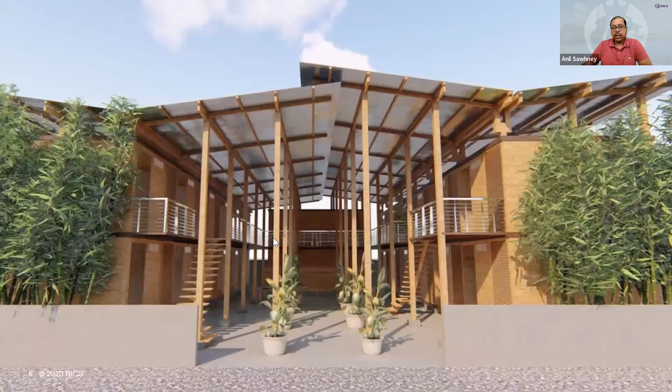We help develop professional skills and knowledge and expand opportunities for our members to apply those professional skills. Everything we do is designed to effect positive change in the built and natural environments. So that's our vision and mission statement as RICS. As I said, we are a global body. We have about 134,000 individual qualified and trainee professional members.

Our membership is what's called a chartered membership. So it's not a simple step of paying your annual membership dues and becoming a member of RICS. Members have to go through a charter process in which there is an assessment, there's an interview, and you have to share your project experiences before you get the MRICS chartered professional status. I am a fellow of the RICS. We have members spread all over the globe, as you can see. I work out of our New York office, but I'm based outside of the Washington, DC area.

And similarly, many of my colleagues are spread all over the globe, with a large number of us in the UK, in London and Birmingham offices. So we operate, as I said previously, in built and natural environments. We operate in the main areas of land, property, and construction. So we're really a broad church.

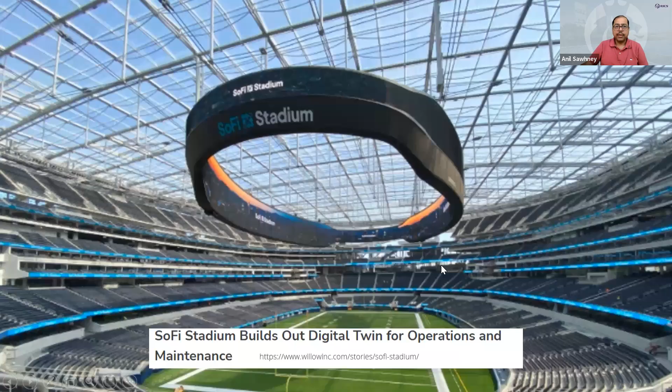So let me just tell you that digital twins is something that's already happening. It's happening now. I'm sure many of you will recognize this, the SoFi Stadium, which is now an operational stadium with a digital twin. This is a pretty large development, by some estimates about $5 billion worth of real estate, lots of ancillary buildings and assets surrounding the main stadium.

So as the construction of this asset was progressing, the owner, the project sponsor, decided to take all the information, the documentation, all construction product methods, materials, information, and put that into a framework which we call digital twin, and hand it over for operations and maintenance. So many of the things that you would expect somebody running this asset to be able to do can now be done using that digital twin. So that's a very clear example of how digital twins are impacting our work and our participation in this emerging area.

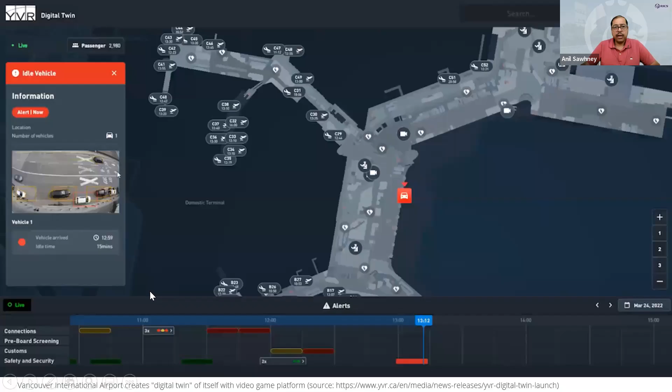Another example recently released, the Vancouver airport has a digital twin where, again, during design and construction phases and for existing assets, all laser scans and all that material was brought together into a twin. And this twin can be used for many things. It can be used on the air side as well as on the passenger side for getting latest and real-time information. Here you see a screenshot and an example of how it's being used by the airport authorities to run the air side of the airport.

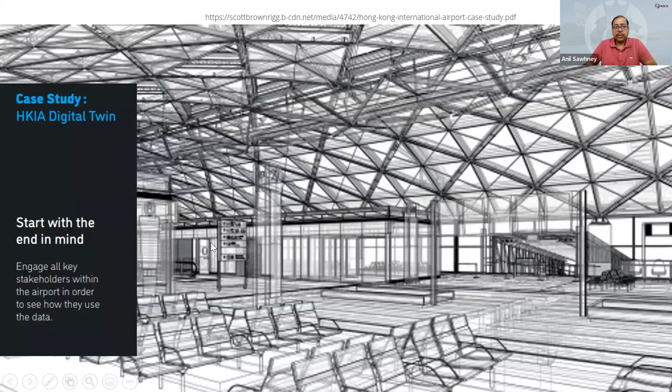Similarly, the Hong Kong International Airport has a digital twin, and it's being used by various stakeholders to run the airport with the help of data that is available through various mechanisms during design, construction, and operation.

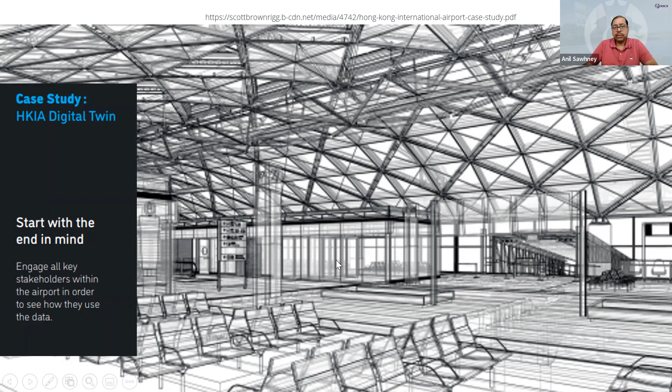Many of you may already have a digital twin of your home. So in my house, I have various gadgets as I'm a construction tech enthusiast. We keep putting in various things. You can have cameras, lock sets that can be operated remotely, garage door openers, various appliances. So these are basically Internet of Things devices that can go into your house during construction or post-construction. Then you could take Matterport, which is commonplace in real estate transactions these days, and create a model of your house. All of that can then be brought together in an interface, called a digital twin, that connects to the physical asset, and you can operate and maintain your house using that digital twin.

I have a little interface, which is a link on the top. I don't think I'm going to go there. With live demos, sometimes things can crash, but you get the point. Earlier on, each one of those devices had its own app. So on my iPhone, I could open the lock. If I forgot to close the garage door and I was in my office, I could actually use an app to close the garage door. But now it's integrated into one dashboard, one interface. And that's where digital twins come into play.

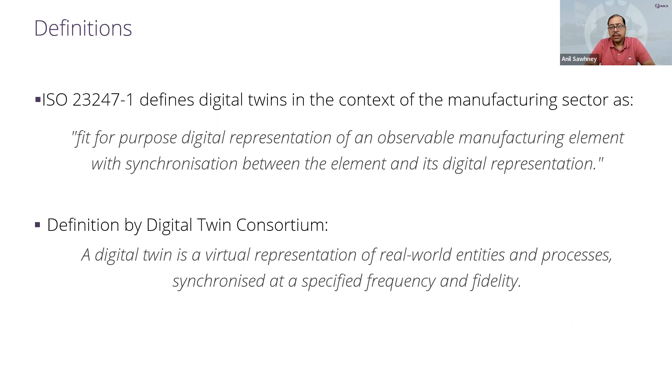What we follow, what RICS follows and our member firms follow, is a definition by the Digital Twin Consortium. DTC is a US-based not-for-profit entity that has been brought together by the likes of Microsoft, Autodesk, and other major industry players. It's sector agnostic, so it applies to the energy sector, perhaps pharma and others, but it also has an AECO working group, and I'm a co-chair of that working group, where a digital twin is defined as a virtual representation of real-world entities and processes synchronized at a specified frequency and fidelity. So that's sort of the technical definition.

There are other definitions. We work closely with the Centre for Digital Built Britain at the University of Cambridge, and they define digital twin as a realistic representation of physical assets. For example, a digital representation of an airplane that can be used to monitor, predict performance, feeding out insights and interventions.

So what you would have noticed by the examples and by the definitions is that right now, the industry, the construction sector, or broadly the built environment sector uses digital twins mostly during the use phase of an asset. So most examples are, can I turn on and off a switch in a conference room when it's not occupied? Can I measure the temperature, humidity, and other factors in a space? Can I figure out maintenance and operation decisions on assets?

So very quickly, you will notice that most of the literature available right now focuses on the operation, maintenance, and end-of-life aspects of a digital twin. But what we have done at RICS is that we try to now connect it back to the design and construction phase, because we believe that digital twins should be used as early in the life cycle as possible. So we took all those definitions of a digital twin and brought them into the context of design and construction.

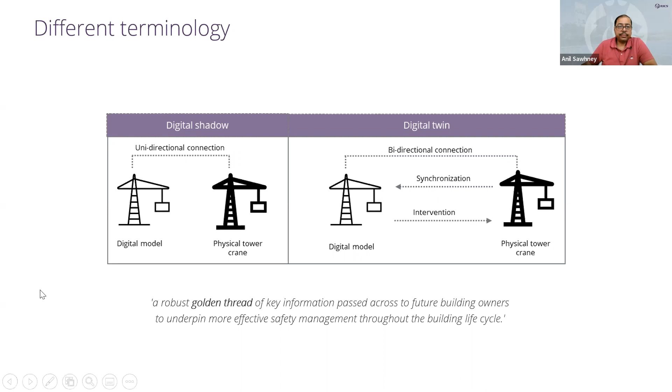But more importantly now, folks are talking about what's called a digital thread. A digital thread can be viewed as containing all the information necessary to generate and provide updates to a digital twin. What is a digital thread? A digital thread is essentially a digital representation of information which connects all the life cycle steps. Because if you generate some information at the concept or design stage, do lots of synthesis and analysis on that data, make decisions, but if you don't connect all this information and carry it forward into the construction, manufacturing, operation, post-life phases, then the idea of digital twin doesn't really work.

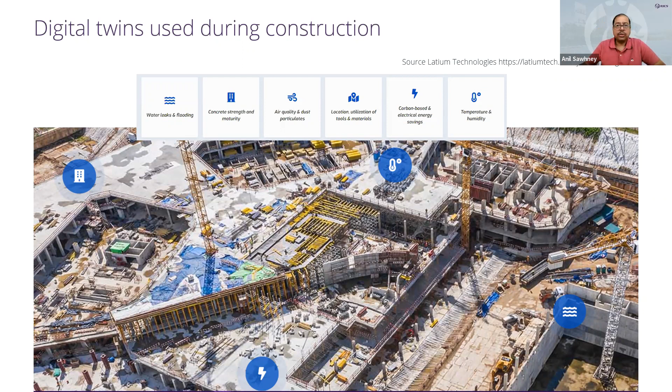So therefore, design and construction is crucial and plays an important role. And we tried to bring all of this together in a book that I wrote with a couple of my colleagues, Javier Irizarry from Georgia Tech and Mike Riley from Liverpool John Moores University in 2020, where we basically are saying that there's a lot of progress being made today in the construction sector, but sometimes it's not unified and glued up together.

You have on the physical layer, on the construction side, folks have worker sensors now or wearable devices where you can see what's happening with your workers. You have robotics automation, you have IoT, 3D printing, lots of other prefab and other physical technologies helping with the production process. You have a digital layer where you have maybe a cloud-based common data environment or a repository for all your information.

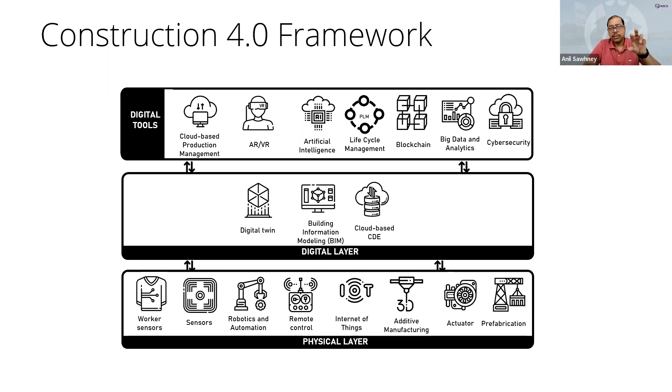You're doing BIM, but you're not gluing all this together if you don't think in terms of a digital twin. Once you start thinking in terms of a digital twin, you can then deploy several digital tools or dashboards that can then help drive construction forward. And this is what the Construction 4.0 framework, the topic of our book, is, and the connectivity of digital twins to that Construction 4.0 framework.

So at the end of the day, the vision is that we will BIM it, we'll twin it, we'll build it, and we'll operate it. So you have projects that turn into assets. We will start BIMing, twinning during design and construction and carry it through into our assets where we operate, maintain, renew, and even do end of life, recycling, and other stuff, repurposing using digital twins.

Now, that then will help our sector address very important outcomes that society is expecting from us today. Environmental outcomes: everywhere today you will see we talk about decarbonization of the construction sector. In fact, I moderated a webinar yesterday for RICS where we talked with experts from Skanska, CBRE, and Gleeds, discussing how decarbonization is important. We'll also talk about social outcomes from our projects and assets now, and obviously we've always talked about economic outcomes. So with the help of this vision of BIMing, twinning, building, operating, we should be able to get that vision accomplished.

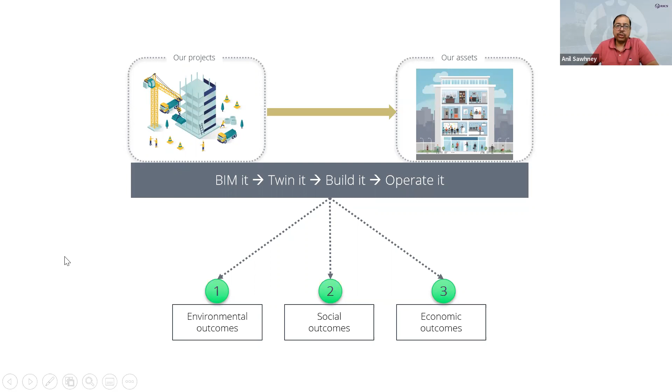But what's crucial is data sharing and collaboration. So as an industry expert, to accomplish those outcomes or broader impacts, we use all the tools, technologies, paradigms available to us. But at the end of the day, if we don't share data and collaborate, none of this is possible. So that's sort of how we can bring it into the construction sector.

I'm going to quickly share with you a global survey that we ran to understand the current state of digital twins. So when we did a survey late last year, this is what we got back, and it's not surprising: very few of those surveyed are actually using some shape or form of digital twins. About 21% are currently using digital twins.

About 18% have taken the first steps to implementation, but a majority of our respondents, who are both members and non-members, say that either they are not considering, they have not heard of digital twins, or they're not using it. So that's the current state. In some ways, it reflects how building information modeling was used in our sector also. If you look back at that journey, the initial adoption was low.

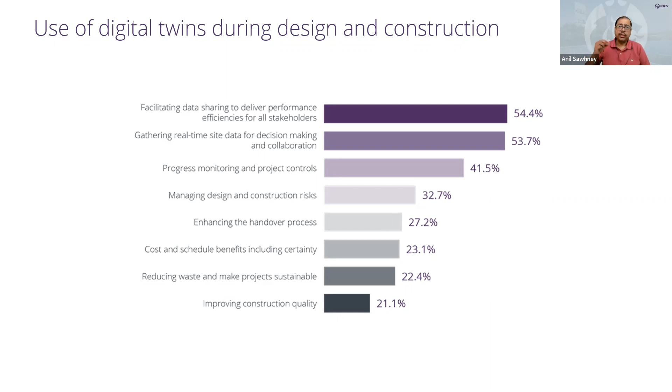And what are digital twins being used for in the design and construction stage? The top three uses, as you can see, are facilitating data sharing to deliver performance efficiencies for all stakeholders, gathering real-time site data for decision-making and collaboration, and then progress monitoring and project controls is the next important use of digital twin during the design and construction stages.

We then ask the same question, but in the operation stage or the in-use phase of the asset. So now the project is complete, the asset is running. What are the top three uses? The topmost use is obviously gathering real-time asset operation and maintenance data, making better operation, maintenance, and renewal decisions, and improving asset performance and owners' bottom line were the top three uses of digital twins during that stage.

We then asked, what are some of the deliverables that owners, project proponents are asking to be produced from digital twins? As-built BIM models is the topmost requirement. So being able to take all that building information model, all the data and information gathered, and compile it, quality check it, and produce it into a format that then can be converted into a digital twin is the topmost expectation.

So if you look at several airport projects right now in the US where digital twins are being adopted, the focus is to assure that all the design, engineering, construction data and information that was generated during construction is packaged into a BIM model that is ready to be used as a digital twin. The second deliverable is dashboards showing connected real-time asset data, occupancy data, occupant satisfaction data, productivity data, all that into a dashboard. And then thirdly, digital assets for various work processes.

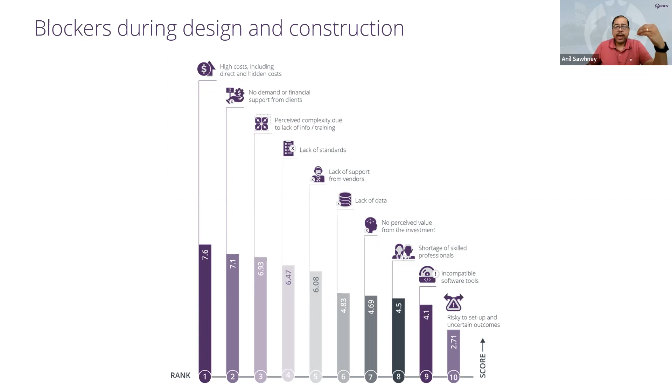And actually, if you think about it, we thought shortage of skilled professionals would be a challenge, but it looks like digital natives, like folks in this class, perhaps have all the digital tools needed to deliver digital twins for our sector. So therefore, it's not really ranked very high in terms of the score. And the score here is what we call the RII, the Relative Importance Index, that was calculated based on the survey that we did. So that's sort of where the main barriers to implementation are. And those were divided again, design and construction stage, and during the use phase of the asset.

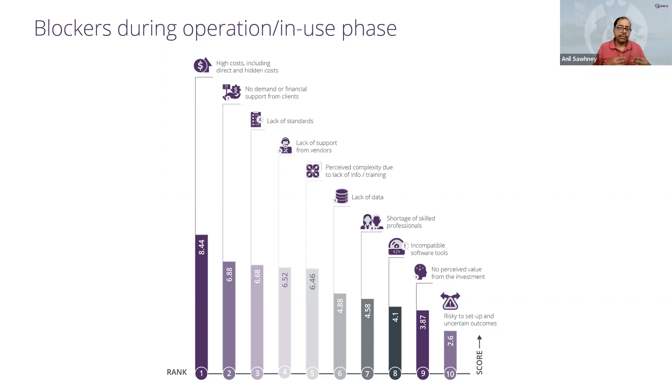The only change here is that in the use phase, there's a lack of standards, because imagine having thousands of IoT devices, sensors, and so on in your asset, and data streaming in, which probably does in building management systems anyways, but not having a standard which takes that raw data, uses perhaps AI or machine learning to provide you with insights and based on which you can make decisions. There is a lack of standards there.

So we looked at some other surveys also. This is something done as a national BIM survey in the UK every year. And it seems BIM is becoming business as usual, which is critical to building the foundations for digital twins. When that question was asked, about 45% of the respondents said that that is the case, that BIM is important, even though you don't need a building information model to build a digital twin. But those who have traveled that journey, have mature BIM processes, obviously can do better on their digital twin journey as well. So a good number responded that it's needed, it's useful, or it's critical. So that's sort of where the current state lies.

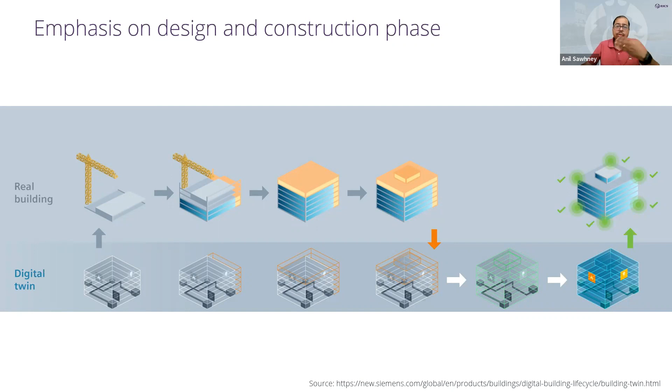I'm going to give you a little bit of a flavor, not too much, of what is really happening when we talk about digital twins. So this is a screen grab from an article by Siemens, where they talk about a digital twin for a building. As I said previously, there may be a stage where there's nothing on the ground yet, but you start preparing its digital or virtual representation in the form of models and start embedding those sensors and other networks into the system. But as the construction progresses, you can continue to improve and develop a high fidelity virtual representation. Once the physical asset is turned over or handed over, you combine these two to truly give a digital twin over to the asset operator that then continues to use for making asset decisions.

So if you think about it, step back, a digital twin from a schematic point of view is really consisting of, again, the physical asset and the virtual representation. The virtual representation is something that is developed during design and construction and post-construction through maybe laser scans and reality capture of existing assets. So you have some static data, which is done through design and construction, but that needs to be stored in a repository. Currently, we use the common data environment as a repository.

And that needs to stay synchronized, so any design construction changes need to be always brought back into the virtual representation. But then when the physical asset is being stood up during construction and is being used during the operation stage, you will have lots of other things happening. You'll have videos, point clouds, images, IoT, sensors, RFID tags, your asset management systems that'll bring edge data, it's called, or edge computing, dynamic data into the mix, which again gets stored in this common data environment, which basically needs to be then put into a dashboard where you can use AI, machine learning, simulation, visualization, and have a human in the loop who can help make decisions and have physical interventions through an actuation layer.

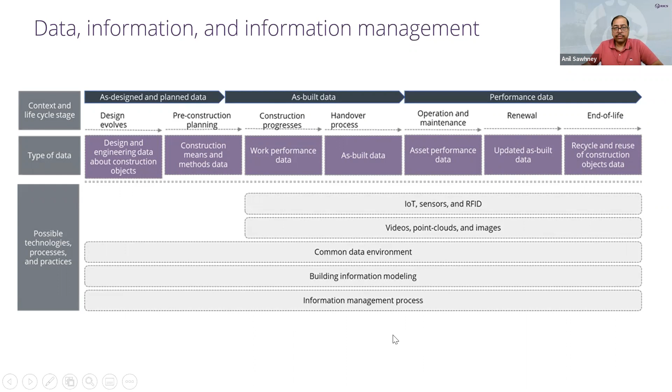So you may run across various scenarios. You have an existing asset. Do you need a digital twin? Perhaps all you need to do is a reality capture, put sensors, create a dashboard. You may have a new asset, but the owner doesn't want a digital twin. Maybe all you need to do is prepare the virtual representation, do a traditional handover or turnover, and let the operation stage take care of a digital twin.

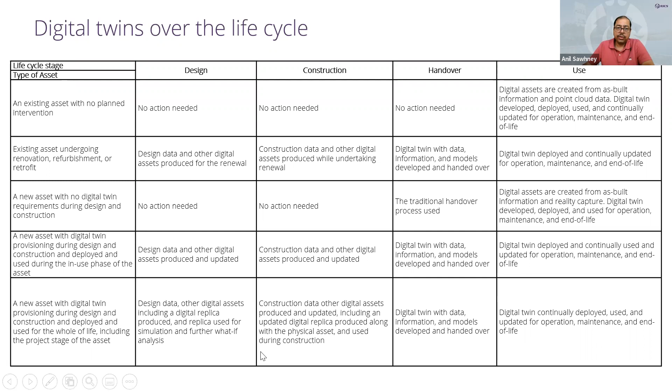You may have a situation where a completely new asset is being built and digital twin is required during design, construction, handover, and use stages. You can again deploy then full-scale digital twin implementation. So you can use digital twins for many things. You can streamline supply chain, you can do energy calculations, you can run what-if simulations, you can make investment and financial decisions using a digital twin, you can reduce the life cycle costs, you can enhance schedule and cost certainty.

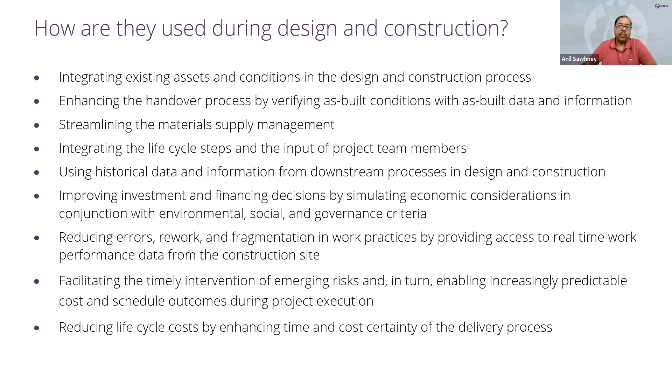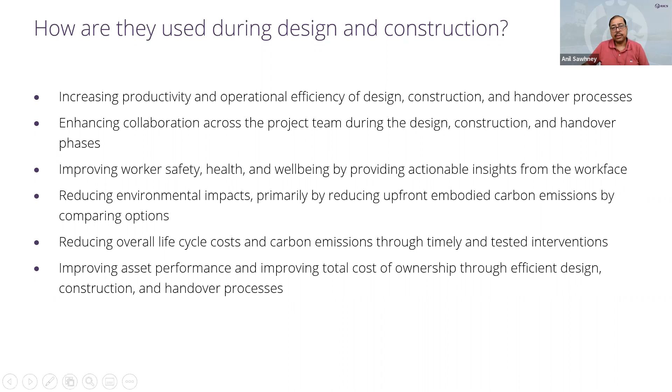So in abstract, there are many, many benefits of digital twins during design and construction, but how well we really capture these depends on how well we take on the digital twin journey. So during these processes, ideally, we could use digital twins to increase productivity and operational efficiency of design, construction, and handover processes, increase collaboration, improve worker safety, health, and well-being, reduce environmental impacts, reduce life cycle costs and carbon emissions, and improve asset performance.

So what are the benefits and quick summary? You can have digital twins at various levels of abstraction. Descriptive digital twins that only help you collect and visualize data. You can have informative digital twins that take that data and generate insights. You can have predictive digital twins that take that data and predict the future state. So you can run what-if simulations. You have comprehensive digital twins that combine all these levels and help you achieve better outcomes.

I don't know when this would happen, but you could have autonomous connected digital twins that run on their own. Perhaps not happening soon, at least in our sector. Today, digital twins are being talked about in terms of the human body, digital twins of a smart factory, digital twin of the entire organization.

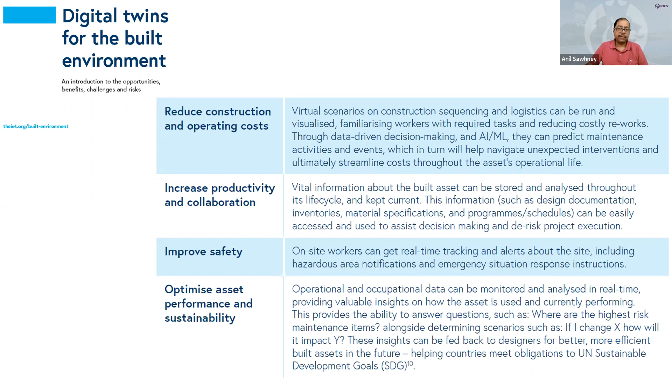So there are numerous benefits. I won't bore you with these, but broadly, they all should help us improve design, construction, and delivery of new assets. They help reduce construction and operating costs, and improve productivity and collaboration, safety, asset performance, and sustainability.